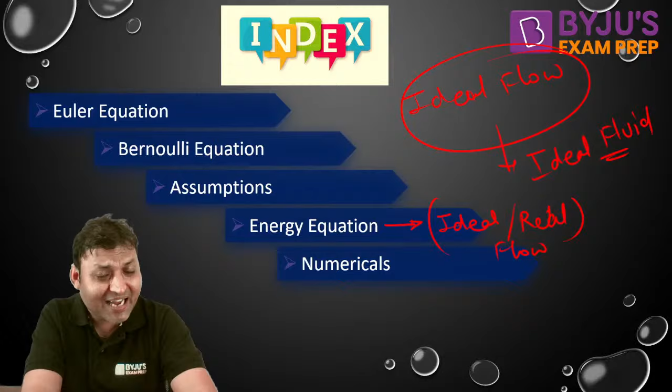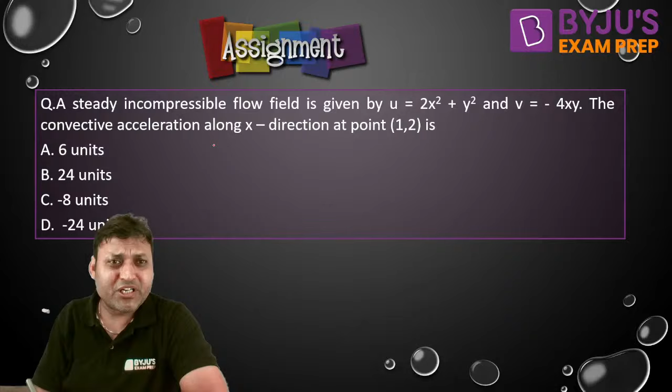Okay, so first of all, we will discuss the assignment question. Very simple question, but the question was from acceleration study. Incompressible flow field is given by U and V. What is the answer to this question? V is minus 4xy.

The convective acceleration. What is the local acceleration if the flow is steady? Do you agree? Local acceleration will be 0.

The convective acceleration along x direction. So the formula for ax convective is equal to u into del u by del x plus v into del u by del y. This will give you the result, and the point where we need to find out the acceleration is 1, 2. Do I need to solve it, or will you be able to solve it on your own?

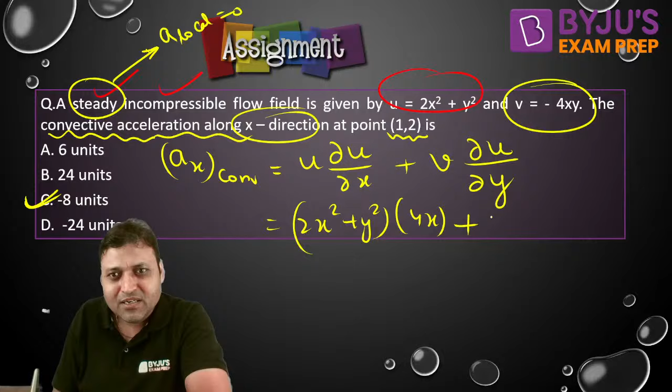U is 2x square plus y square. Then del u by del x is 4x, and v is minus 4xy, into del u by del y is 2y. Put the value.

x is equal to 1 and y is equal to 2. You will get ax convective as minus 8 units, isn't it? You will be getting minus 8 units.

Can you find out ay convective? Had anybody tried ay convective? Can you guys find out ay convective?

If you want to find out ay, local will be 0 because the velocity is not a function of time. The flow is steady, so the local will be 0. So for ay convective, you need to write u into del v by del x plus v into del v by del y, and put x is equal to 1 and y is equal to 2.

Can you let me know whoever had calculated ay convective? And if the question is asking you to find out the total acceleration, then it is under root of ax square plus ay square, isn't it? What is ay? What is the value of ay?

I have also given it a try. I had also tried it. I had got minus 16 units. Did you guys get minus 16 units?

So it is 8 square plus 16 square under root, which will be the total acceleration at point 1, 2. How many of you have got minus 16 units?

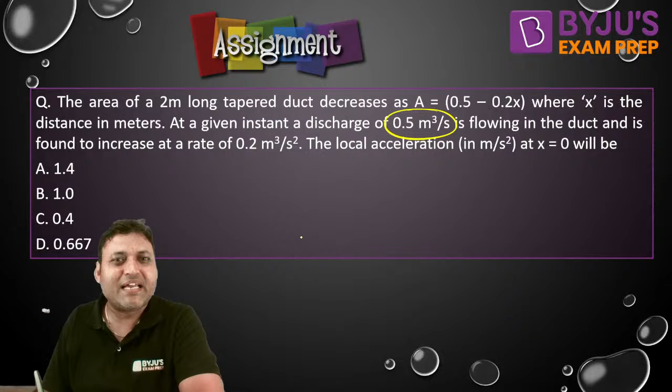At a given instant, a discharge of 0.5 meter cube per second is flowing in the duct and is found to increase at the rate of, what is this? This is dq by dt. The rate of change of discharge is 0.2 meter cube per second per second.

What is the answer? The local acceleration in meter per second square at x is equal to 0. What is the expression for local acceleration?

It is del v by del t, and v can be written from the continuity equation. V is q by a, because area is not a function of time, so it is 1 by a into del q by del t, which will give you the answer. So that is what 1 by a is.

1 upon 0.5 minus 0.2x, into del q by del t, which is 0.2, and at x is equal to 0, we will get the local acceleration to be 0.2 upon 0.5, that is 0.4 meter per second square.

Yes, Bhavya, well done, good. C is the correct answer for this as well.

Can you find out the convective acceleration? Had anybody tried for convective acceleration at x is equal to 0? What is the value of convective acceleration?

What is the value of convective acceleration? If we talk about the convective acceleration, that is v into del v by del x. That is how the convective acceleration will be.

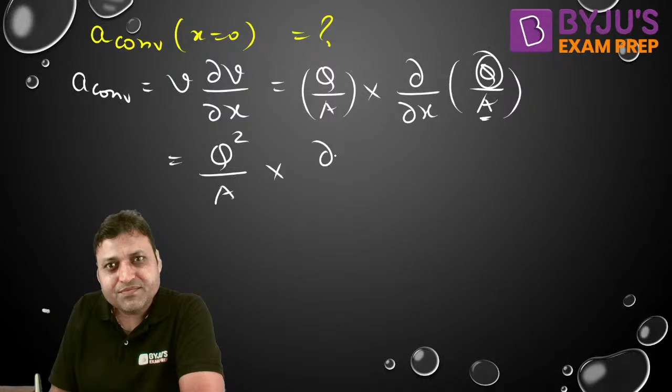We can write q by a. Q is not a function of x, area is a function of x, so it will be q square upon a into del, differentiation of 1 by a. That is how it will be solved.

So q square by a into del by del x of 1 upon 0.5 minus 0.2x. Can you do the differentiation?

It will be q square by a into minus 1 upon 0.5 minus 0.2 whole square, into minus 0.2.

Area is also this. If you do the calculation and put x is equal to 0, you will get 0.4 unit or 0.4 meter per second square for ax. That is the correct answer. All right.

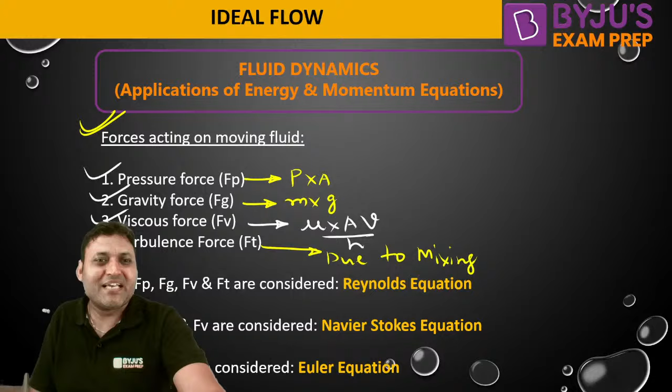Then the gravity force, that is the weight, m into g, that is the gravity force. The next major force acting on the fluid is viscous force, which can be calculated from Newton's law of viscosity, mu A v by h. And there is another force called turbulence force, which is due to mixing. When mixing dominates the flow, a force develops called turbulence force. So these are all the major forces acting on the moving fluid.

Now if all the forces are taken into consideration in the analysis, we get the Reynolds equation. That is for turbulent flow. Analysis of turbulent flow is done by using the Reynolds equation.

Now, if the turbulence force is ignored, and only pressure force, gravity force and viscous force are taken into consideration, the equation obtained is called the Navier-Stokes equation.

How many of you know the Navier-Stokes equation? How many of you are comfortable with it? For analysis of laminar flow, the equation to be used is the Navier-Stokes equation. And if the viscous force is not considered, then only pressure force and gravity force are taken into consideration.

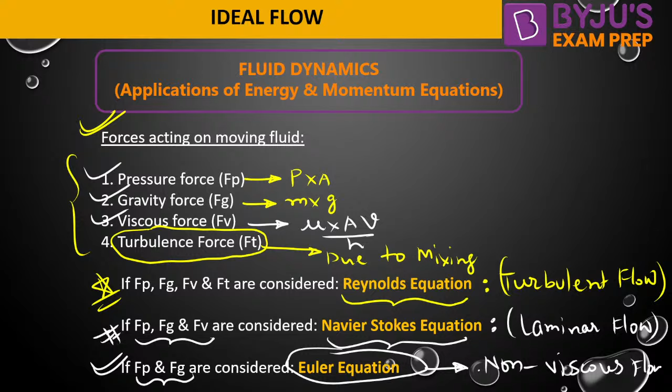Then we get the equation called the Euler equation, that is for non-viscous flow. So we start our analysis with the Euler equation for ideal flow, then move to the Navier-Stokes equation for laminar flow, and finally enter the Reynolds equation for analysis of turbulent flow. That is how the difficulty level of analysis keeps increasing, isn't it?

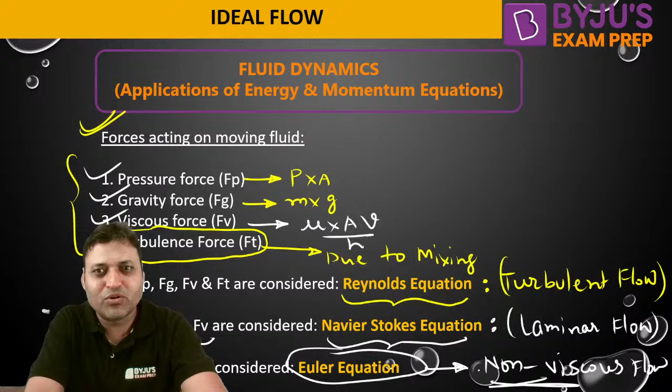So today's session is all about ideal flow. Let us talk about the Euler equation first. The Euler equation is obtained when we take these assumptions into consideration.

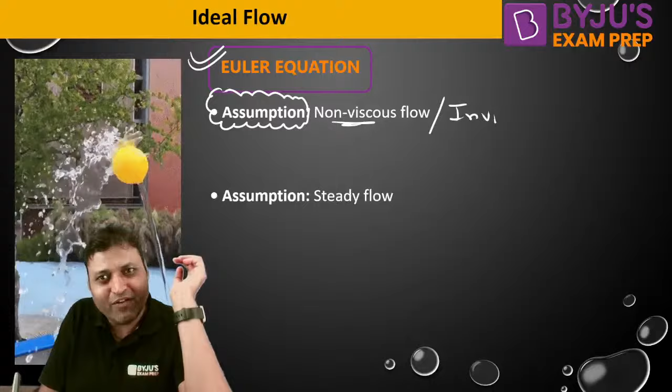The flow must be non-viscous. Non-viscous is also known as inviscid flow, or we can call it frictionless flow. Can you let me know when the flow is non-viscous or frictionless? When tau is equal to zero, when there is no shear stress developed, then the flow is non-viscous.

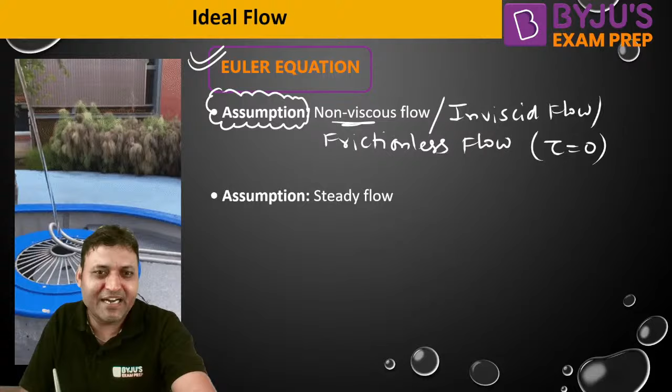No, non-viscous is not ideal. By saying non-viscous does not mean ideal. Non-viscous means there is no shear stress developed between the adjacent fluid particles, and there is no relative motion between the adjacent fluid particles.

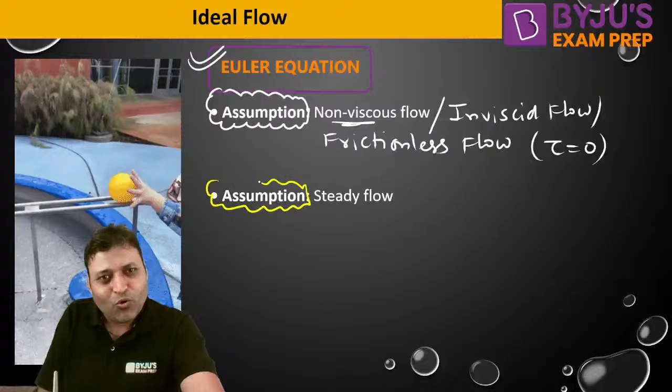And the next assumption is steady flow. What is steady flow? When the fluid behavior does not change with time, when the pressure, density, velocity are independent of time, then the flow becomes steady flow.

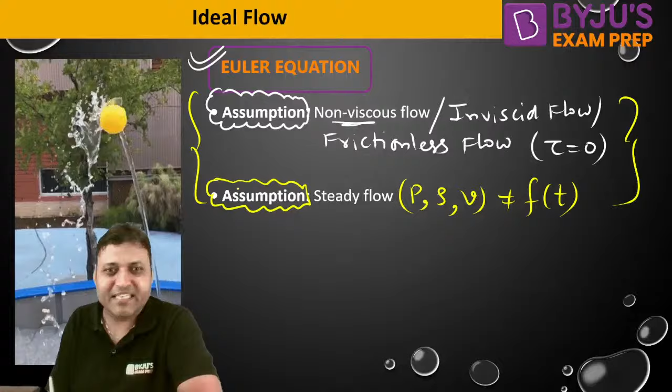So when we develop the mathematical expression keeping these assumptions into consideration, we get dP by rho plus g into dZ plus V into dV is equal to zero. This is called the Euler equation.

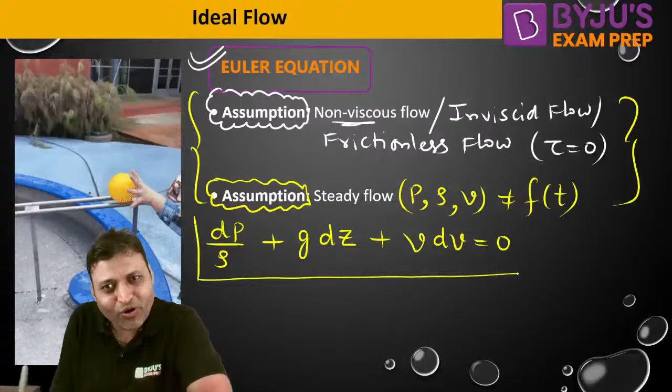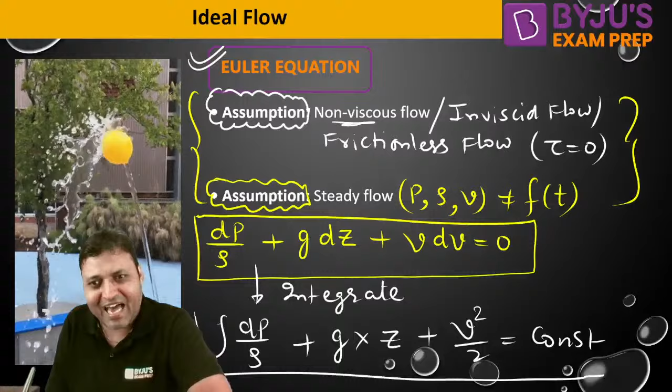And if we integrate this equation, we get: integration of dP by rho plus g into integration of dZ, that is Z, plus integration of V dV, that is V square by 2, is equal to a constant. These are the Euler equations — one is the differential form, the other is the integral form.

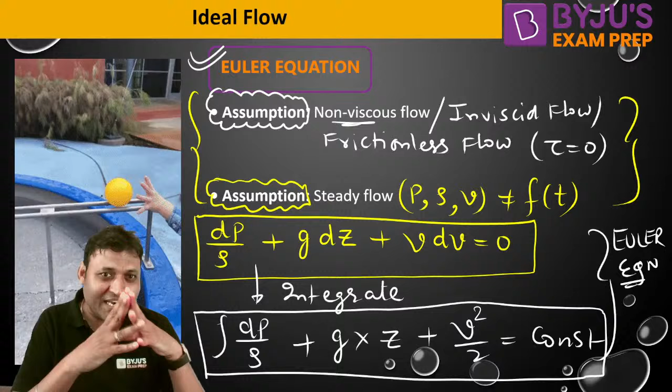For the Euler equation, the assumptions taken into consideration are that the flow must be non-viscous, inviscid or frictionless, as well as the flow must be steady. So we are just one step behind the Bernoulli equation.

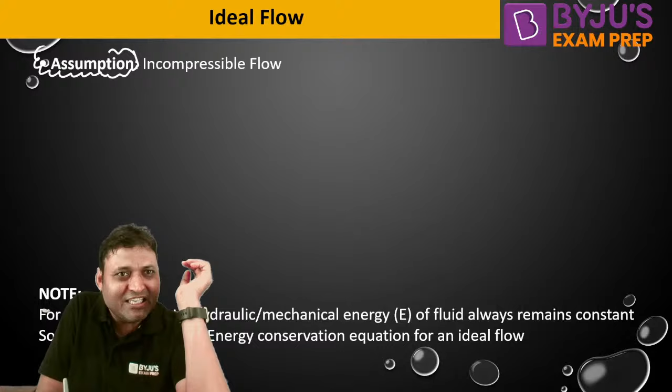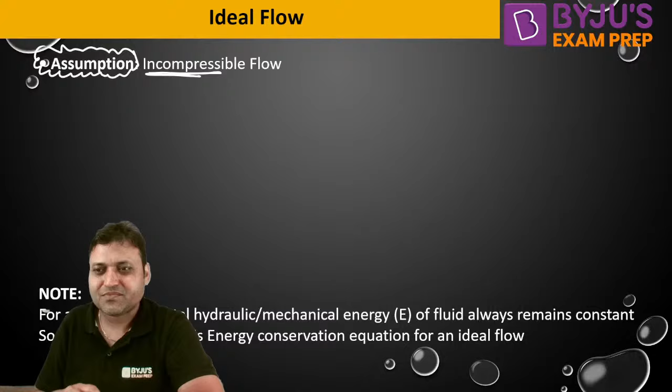From this equation, we can easily obtain the Bernoulli equation when we take into consideration another assumption, that is incompressible flow. Anybody have any idea when we call the flow incompressible? When the density of the flow is neither a function of space nor time — if density remains constant, then the flow is incompressible.

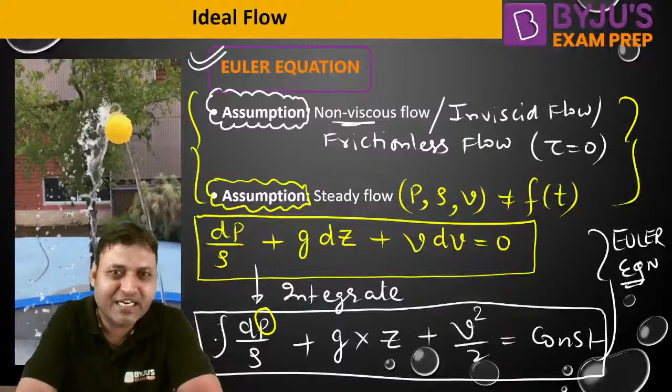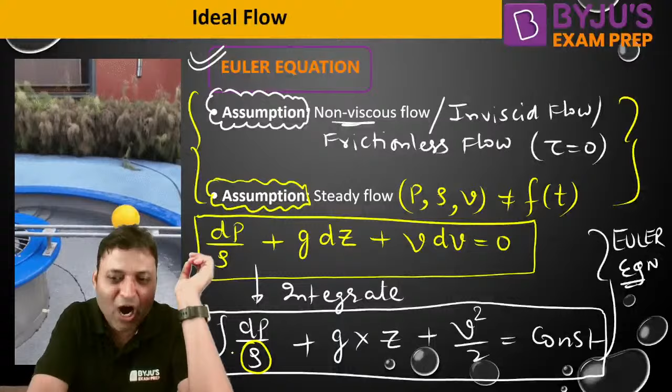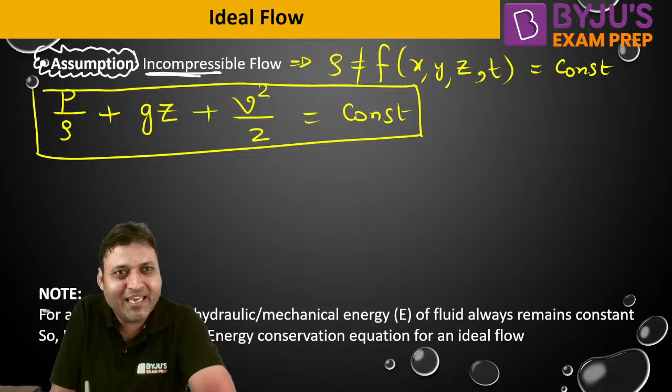In the previous expression, I kept pressure inside the integration because the density was not constant. That is why we did not take density outside. But as we now assume the flow to be incompressible, we are left with P by rho plus gZ plus V square by 2 is equal to constant. That is nothing but our favorite Bernoulli equation. This is called the Bernoulli equation.

This is called the Bernoulli equation. What are the assumptions for the Bernoulli equation? There are three assumptions we have taken into consideration.

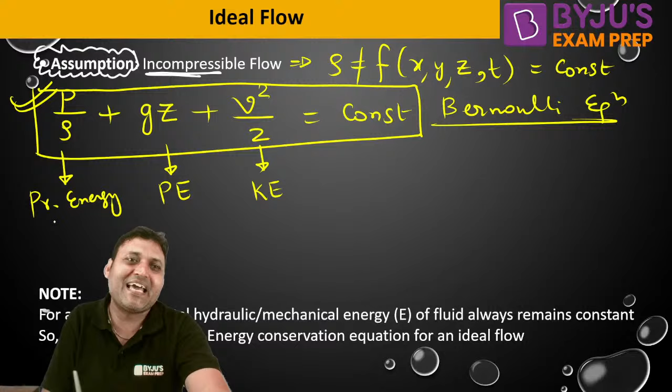Each and every term here represents the energy of the fluid. The first term represents the pressure energy, the second term represents the potential energy, and the third term represents the kinetic energy of the fluid. The sum of all these three energies is nothing but the total hydraulic energy or mechanical energy of the fluid.

Why do we call it mechanical energy? Because these energies can be easily converted into mechanical work. That is why they are known as the mechanical energy of the fluid. So that is how we obtain the Bernoulli equation.

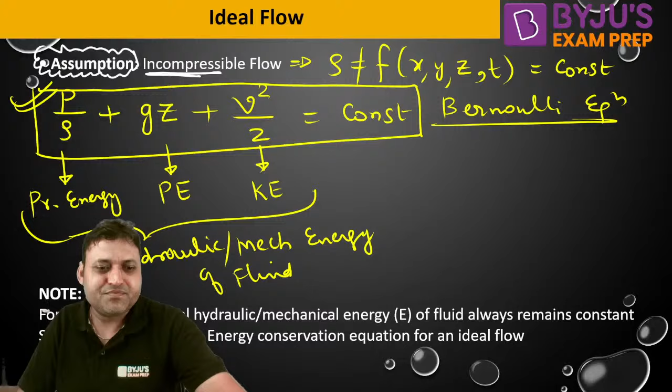Is this clear? So my question to everyone is, what is the unit of each and every term here? Can you guys let me know?

Pressure energy is written as pressure into volume, that is the pressure energy. M into G into Z is potential energy, and half mv square is kinetic energy, isn't it? Pressure energy is pressure into volume.

If we divide each and every term by mass, volume per unit mass is 1 by density, that is how P by rho comes into picture. If we divide this by mass, that is how Gz comes into picture. If we divide by mass, then V square by 2 comes into picture.

So it is energy, the unit of energy is joule. Pressure energy is joule, so the unit of each and every term represents energy per unit mass. So the unit is joule per kg, it is joule per kg, not joule per meter cube. The unit of each and every term is joule per kg.

Is this clear? So when the flow is non-viscous, steady and incompressible, we call that flow to be ideal flow, and for the ideal flow, the total hydraulic or mechanical energy of the fluid always remains constant. That is why the Bernoulli equation is nothing but the energy conservation equation for an ideal flow.

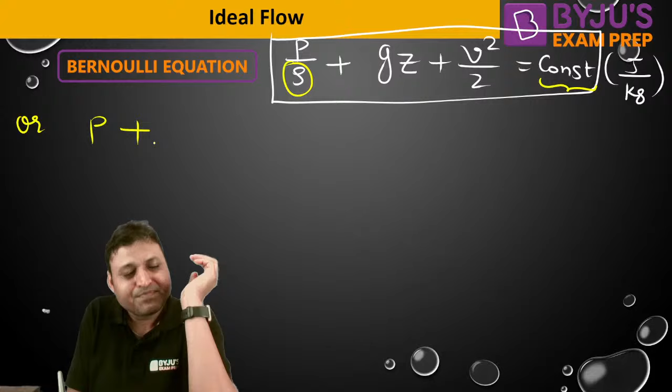Another way of writing the Bernoulli equation is, if we multiply the whole equation by rho, because rho is a constant parameter, there is no effect on the right hand side. So we can also write it as P plus rho Gz plus rho V square by 2 is equal to constant multiplied by rho, which is another constant.

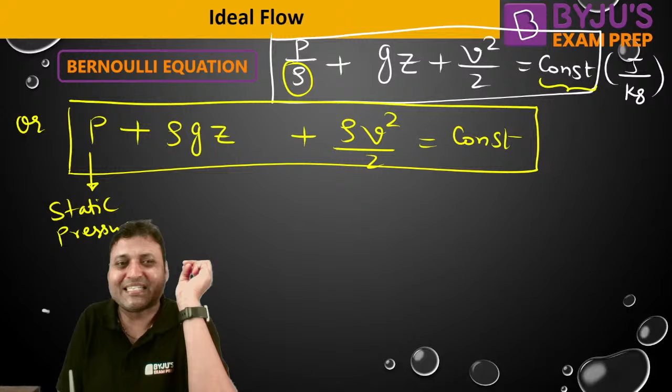What is the unit of each and every term here? The first term represents the pressure of the fluid, that is called the static pressure of the fluid. What is the unit? Yes, the unit is Pascal. What is the unit in terms of energy? Still it represents the energy. The first term represents the static pressure of the fluid.

The second term represents the hydrostatic pressure of the fluid, rho Gz, from the hydrostatic law, that is called hydrostatic pressure. And the third term can be called the dynamic pressure of the fluid, which has the unit of pressure, but it is the kinetic energy represented in the unit of pressure, that is called the dynamic pressure of the fluid.

When we combine the static pressure and hydrostatic pressure, we can call it piezometric pressure. Have you heard the name piezometric pressure?

The static pressure is obtained from manometers, which are instruments used for measuring the static pressure of the fluid, P. So this is the reading of the manometer. Can you let me know the static pressure? Will it be absolute pressure or gauge pressure? In this equation, the static pressure, will it be absolute or gauge? Can you let me know?

Pressure into volume is the pressure energy, but volume is missing here, so each and every term represents energy per unit volume. The unit is joule per meter cube, or joule can be written as Newton meter, so it will be Newton per meter square. That is how Newton per meter square, or Pascal, can also be obtained. Joule per meter cube is nothing but Newton per meter square, since joule is Newton into meter. So my question to everyone is, the static pressure, is it absolute pressure or the gauge pressure?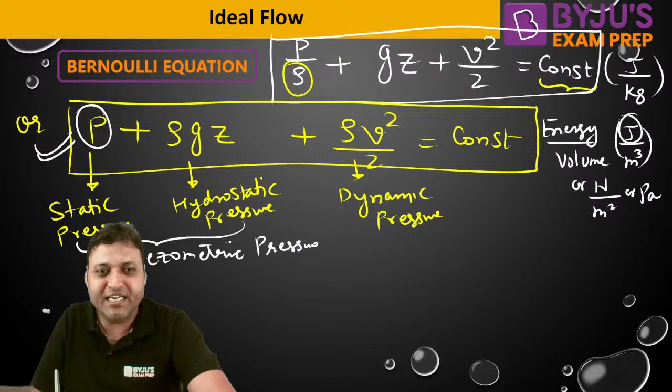Another way of writing this is the second way. If we divide the entire equation by rho and g both, we get P by rho g plus Z, then V square by 2g is another constant. This is the expression we frequently use in our mathematical calculations. This is the third way of representing the Bernoulli equation.

What is the unit of each and every term here? So for Z, m into g is missing, so it is energy per unit weight, that is joule per Newton, or we can call it meter. So it is head, the static pressure head. The first term represents the static pressure head.

Sorry. What happened?

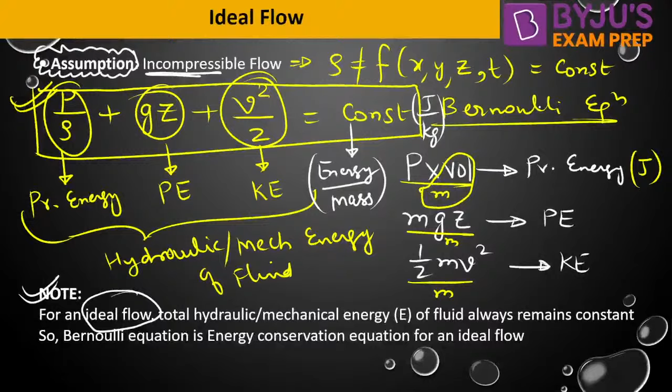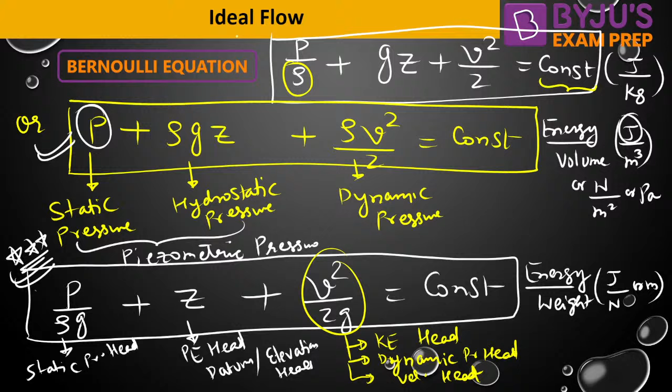Yes, the first term represents the static pressure of the fluid, the static pressure head. The second term represents the potential energy head of the fluid, which we can call datum head or elevation head. The third term we can call the kinetic energy head, or the dynamic pressure head, or the velocity head. So these are the three ways of representing the Bernoulli equation: number 1, number 2, and number 3.

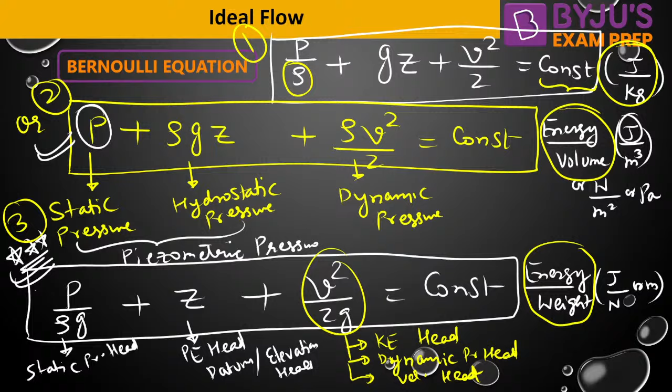But you should be clear with the unit of each and every term. The first expression represents energy per unit mass, the second expression represents energy per unit volume, and the third expression represents energy per unit weight. Is it clear to everyone? Is this clear?

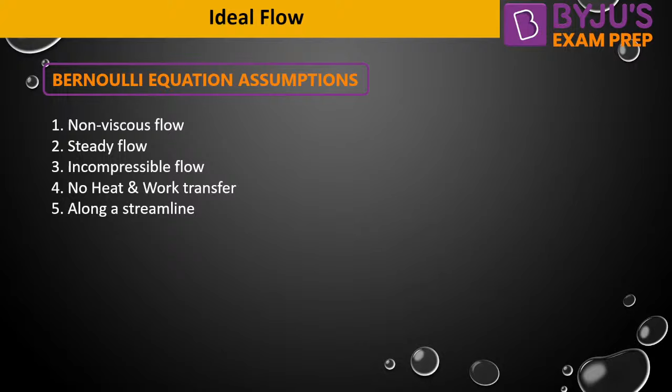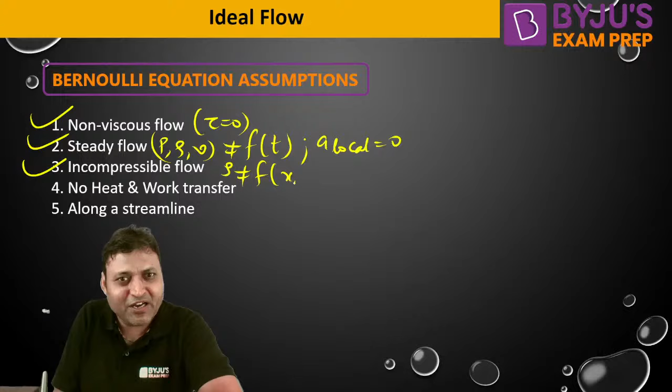Assumptions which are required in applying the Bernoulli equation. I've already discussed some of these assumptions: non-viscous flow, tau must be 0; steady flow, where pressure, density, velocity are independent of time, or local acceleration should be 0; the flow must be incompressible, density should not be a function of space or time, density must remain constant; and there is no heat or work transfer. What does that mean? There should not be any other form of energy transfer to take place in the fluid flow.

Energy transfer can be possible in two ways, as you must have studied in thermodynamics: either in the form of heat transfer or work transfer. So there should not be any other form of energy transfer. And if the points are lying along a streamline, even if it is rotational flow, for the rotational flow field, the points should be on the same streamline.

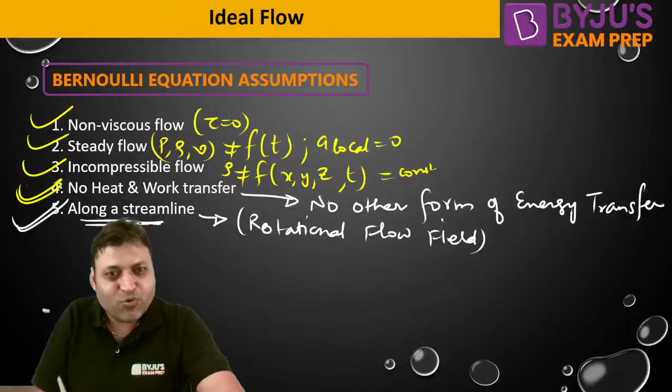So these are the various assumptions to be taken into consideration. I had asked you guys, what is P? The equation is P by rho g plus Z plus V square by 2g must be constant. That is the Bernoulli equation. What is P here? P is the static pressure of the fluid, which can be measured by using the manometer by writing the pressure equation.

The static pressure, is it gauge or absolute? It is purely your choice. You can take it absolute or gauge. That is your choice, it will not affect the final result. You can take the pressure to be gauge pressure or absolute pressure.

What is Z? Z is the vertical distance from a reference line, always the vertical distance from a reference. You can draw a horizontal line, which is the reference line, and the vertical distance of the point from the reference line is Z, and V is the flow velocity. That is how we can apply the Bernoulli equation when the flow fulfills all the mentioned assumptions in the question.

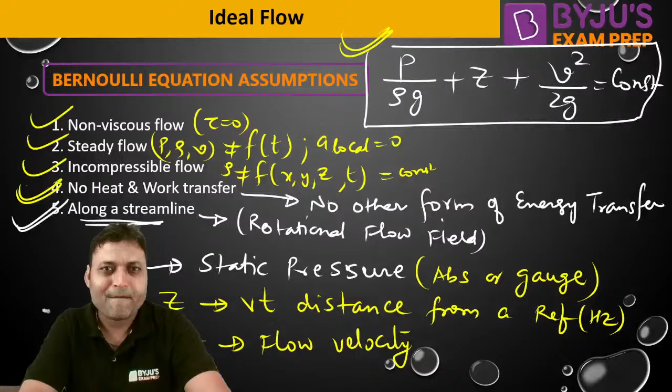The Euler equation is not based on the conservation of energy actually. If you go to the derivation, you will understand that the Euler equation is based on the conservation of momentum. It is the momentum conservation of Newton's second law which gives rise to the Euler equation. So the Euler equation is based on conservation of momentum or Newton's second law. Yes, Susoban, conservation of energy will not be the correct answer. It will be the conservation of momentum.

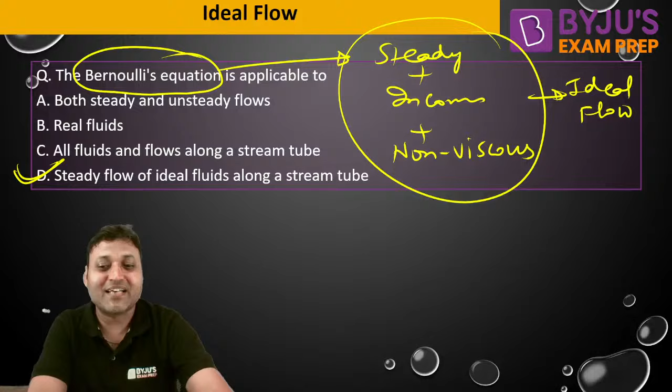That is how theoretical questions can also be framed out of these concepts. Theoretical questions are actually more dangerous than numerical ones. So when the flow is ideal, there will not be any energy loss in the flow. That is how we can call the flow ideal.

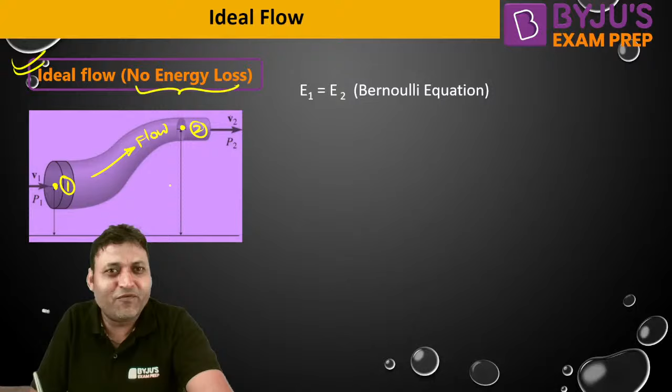This is, let us say, point 1. This is, let us say, point 2. There is a fluid flowing and the flow is ideal. So for the ideal flow, the total hydraulic energy at any point 1 will be equal to...

That is not called the Bernoulli equation, Susoban. We do not call it the Bernoulli equation. Energy conservation is a universal law. We can apply energy conservation everywhere. But if we are using the word specifically Bernoulli equation, then it is only applicable when the flow is ideal, when there is no energy loss. Have you understood it?

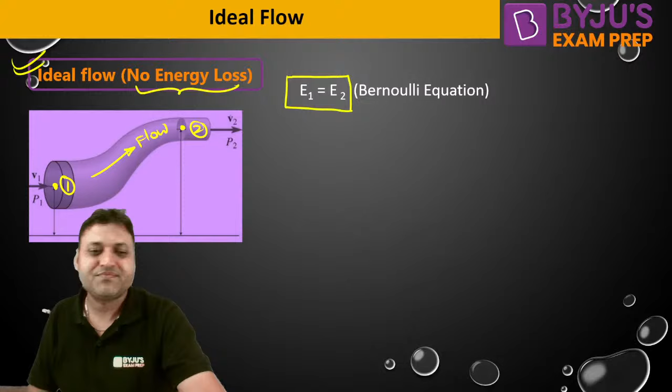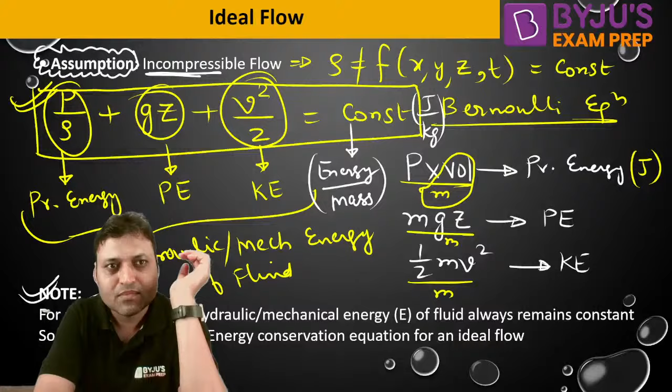So when there is no energy loss, only then do we call it the Bernoulli equation. So total energy at 1 will be equal to total energy at 2, or we can write H1 is equal to H2. What is H? That is the total energy head. I should have mentioned it here. This is called H. H is the total energy head. Right? H1 will be equal to H2.

Or we can say P1 by rho g. P1 is the static pressure here, already shown. P1 is the static pressure at point 1, P2 is the static pressure at point 2. Static pressure is obtained when the manometer is attached normal to the flow. So we can say P1 by rho g, pressure head at 1, plus Z1.

How to find out Z1? You draw a horizontal line and call it the reference line. Z1 is the vertical height of point 1 from the reference line, and Z2 is the vertical height of point 2 from the reference line. P1 by rho g plus Z1, and V1 is the velocity of flow at point 1, V1 square by 2g, is equal to pressure at 2 plus Z2 plus V2 square by 2g.

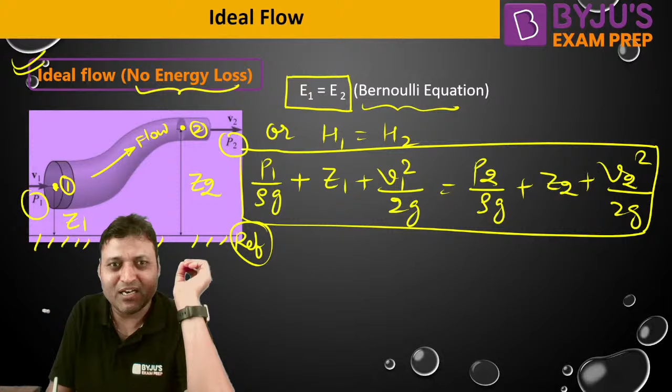That is how we can write the Bernoulli equation for ideal flow. And similarly, we can apply it for real flow also. But that is not the Bernoulli equation, that is called the energy equation. We do not call it the Bernoulli equation.

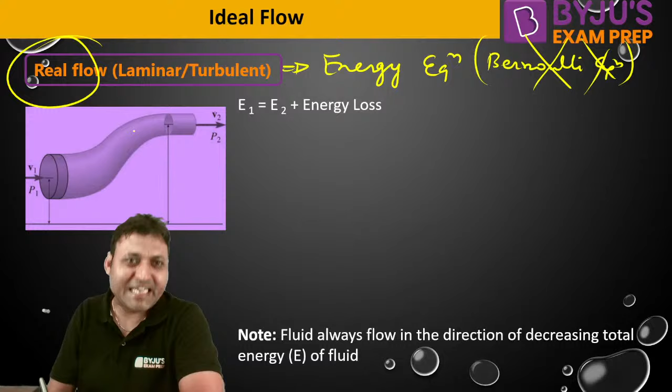It is not called as Bernoulli equation when the equation, the energy conservation, is applied to the real flow, either laminar or turbulent. In the flow direction there is energy loss. If the flow is from 1 to 2, there will be some energy loss in the flow direction due to friction.

This is between the fluid particles, because the flow is viscous. So we can say, because the flow is from 1 to 2, the total energy at 1 will be equal to total energy at 2 plus the energy loss from 1 to 2. That is why the energy loss is from 1 to 2. Or we can say E1 will be greater than E2 because the flow is from 1 to 2.

The total hydraulic energy at 1 is equal to total hydraulic energy at 2. Or we can say H1 is equal to H2 plus the loss from 1 to 2, the head loss from 1 to 2 in terms of head loss. This is how you can write the energy conservation.

So P1 by rho g plus Z1 plus V1 square by 2g, that is H1. That is H1 is equal to P2 by rho g pressure head plus Z2 plus V2 square by 2g, that is H2 plus HL. HL is the frictional head loss from 1 to 2. That is called as energy head loss or the frictional head loss. We can call it as energy head loss.

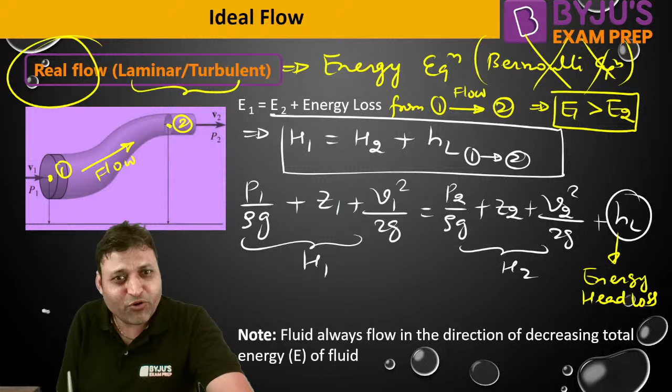And that is due to friction, that is why we can call it as frictional head loss also. If the flow would have been from 2 to 1, can you write the energy equation for the flow from 2 to 1? If the flow is from 2 to 1, then we will say E2 is greater than E1, or we can say H2 is equal to H1 plus HL from 2 to 1.

That is how the energy conservation works. So it will be P2 by rho g plus Z2 plus V2 square by 2g is equal to P1 by rho g plus Z1 plus V1 square by 2g plus HL from 2 to 1.

So what we can conclude from here, the fluid always flows in the direction of decreasing total energy of the fluid. If the flow is from 1 to 2, the energy at 2 will be less than energy at 1. If the flow is from 2 to 1, the energy at 2 will be greater than energy at 1. So the fluid always flows in the direction of decreasing energy, or we can say in the flow direction total energy decreases. In the flow direction, the total hydraulic energy always decreases.

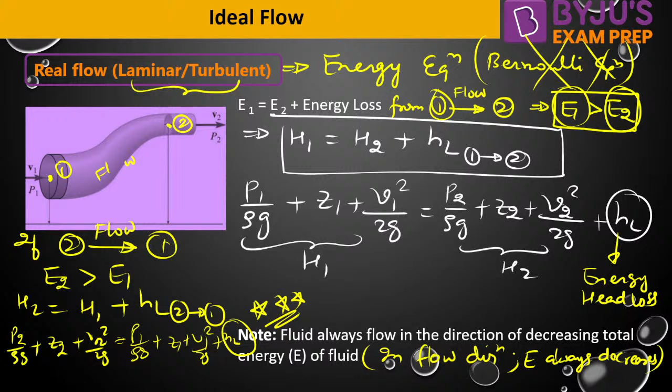Is this clear? That is how we can extend the energy conservation equation for the real flow. If the losses are not considered, the same equation can be called as Bernoulli equation. Otherwise, we do not call it as Bernoulli equation.

Again, let us solve some questions and then we will stop our session. There is a question on the screen. Can you find out the answer to this one? Now it is your turn. Can you just solve the question which is there on the screen?

There are two locations, 1 and 2.

Thank you, Deepak. Thank you for your motivational saying. We are also human, and we also require motivation. And we get our motivation, we get our energy, we get charged up from the students' comments only. Definitely, I will bring more and more such sessions.

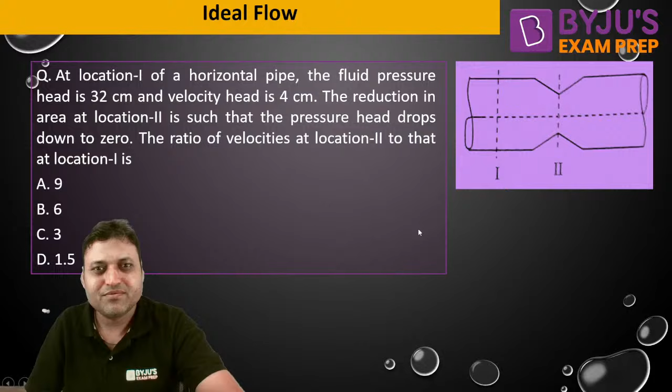Now there is a question on the screen. Can you just let me know the answer? Can you? There are two sections, 1 and 2. Horizontal pipe, the pipe is horizontal. Can we say Z1 is equal to Z2? Because the points are lying at the same elevation.

The fluid pressure head is 32 centimeter. What is that? At location 1, so P1 by rho g is 32 centimeter. It is P1 by rho g head, it is about head. And the velocity head V1 square by 2g is equal to 4 centimeter. The reduction in area at location 2 is such that the pressure head drops down to 0.

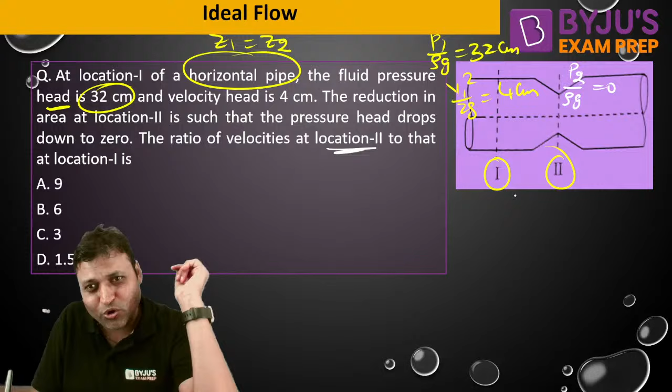What does that mean? The pressure P2 by rho g becomes 0, and the ratio of velocity at location 2 to that at location 1 is asked. The question is asking you to find out the ratio of V2 by V1. What is the answer? So if we apply the Bernoulli equation, we can say P1 by rho g plus V1 square by 2g should be equal to V2 square by 2g. Do you agree or not? Because I have put Z1 is equal to Z2 and P2 is equal to 0.

That is what I have applied. So P1 by rho g is 32 plus 4, that is V2 square by 2g. V2 square by 2g is equal to 36 centimeter. So V2 square by 2g divided by V1 square by 2g is equal to 36 divided by 4.

That is 9. But 2g is getting cancelled out. The question is not about V2 square by V1 square, it is about V2 by V1. Isn't it under root 9? That is 3. C is the correct answer.

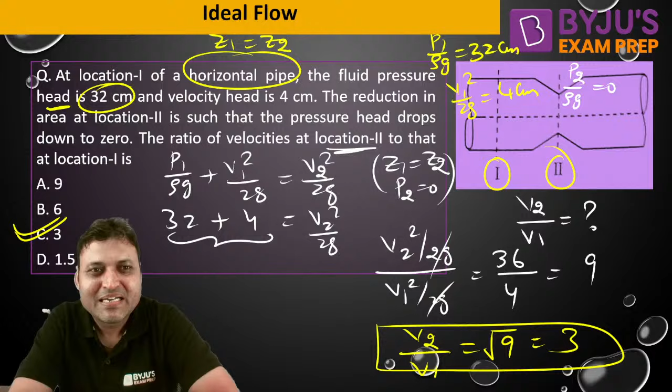Yes, Bhavya. Where are others? Not interested in solving? Didn't bring your notebook? C will be the right answer. Those who have not given me the answer for this question, please, it's my humble request, give me the answer for the next one. The next question is on the screen.

The liquid flows downward through a tapered vertical portion of a pipe. At the entrance, this is the entrance, this is the exit. Because the flow is from entrance to exit, that is the flow direction, the static pressures are equal.

What does that mean? If we call the entrance to be 1 and exit to be 2, so P1 is equal to P2. Static pressures are equal, P1 is equal to P2, isn't it?

If for a vertical height h, the velocity becomes 4 times, V1 is equal to V and V2 becomes 4V. Then the ratio of h to the velocity head. What is the velocity head? So the question is about h upon v, velocity head at entrance.

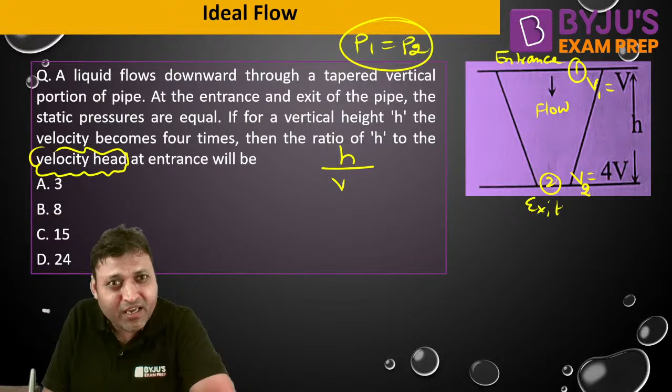So V1 square by 2g, that is what we need to find out. The ratio of h upon V1 square by 2g. It is not velocity, it is the velocity head at entrance.

So now if we apply the Bernoulli equation, for that we need Z1 and Z2. If I call this to be reference line, we can call any horizontal line to be reference line. If we call this horizontal line to be reference line, do you agree Z1 will be equal to 0? And point 2 is lying below the reference line. Do you agree Z2 is equal to minus h?

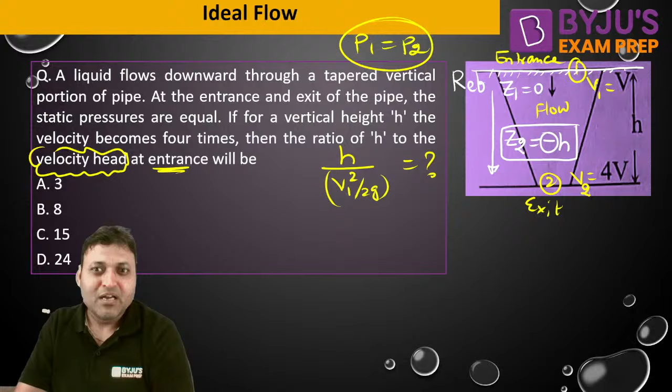That is important. If the point lies on the reference line, the potential energy will be 0. If the point is lying below the reference line, the potential energy will be negative. If the point is lying above the reference line, then it will be a positive value. So P1 and P2 are equal if I write the Bernoulli equation.

So we can say Z1 is also 0. V1 square by 2g on the left hand side is equal to Z2 plus V2 square by 2g. Put the value. V1 square by 2g, if we put the values, what is V1? That is V. So V square by 2g is equal to minus h plus V2 is 4V square by 2g. Do the calculation.

So it will be h is equal to 16v square by 2g minus v square by 2g. That will give you h equal to 15v square by 2g, and don't you think h upon v square by 2g is nothing but 15? Who has the correct answer? C is correct. Mithun, how did 16 come? C will be the correct answer, 15 is the right answer.

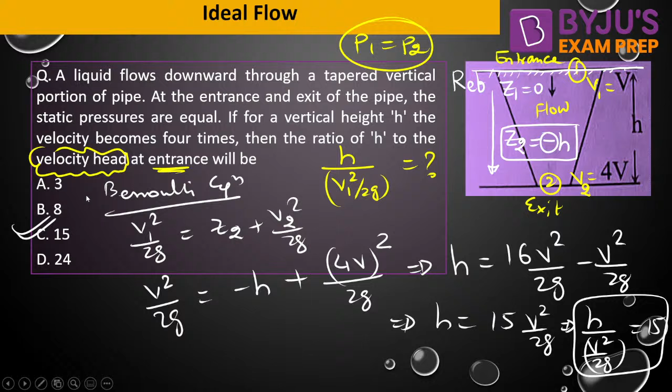That is how you should be able to apply the Bernoulli equation. I hope it is clear. Any doubt to anyone, do let me know. Can you solve the next one? Can you solve the next question?

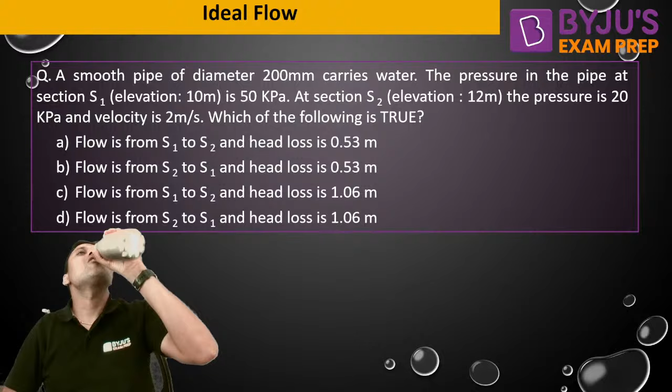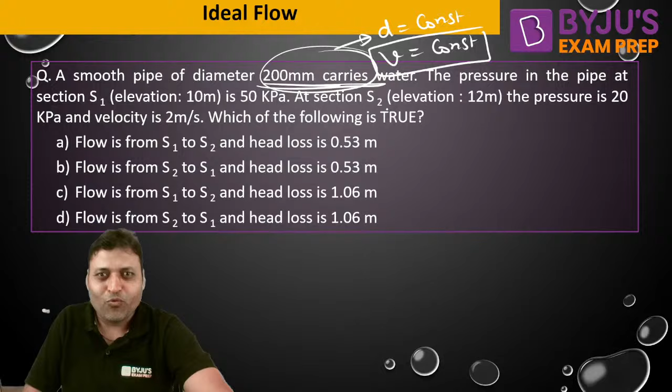The next question: a smooth pipe of diameter 200 mm carries water. It means the diameter is constant. And if the diameter is constant, from the continuity equation velocity must also be constant.

Velocity will be constant. The pressure in the pipe at section S1, which is having an elevation of 10 meter, is 50 kilopascal. Pressure is given at 1. At section S2, the elevation, the vertical height from the reference, is given as 12 meter. The pressure is 20 kilopascal and the velocity is 2 meter per second, that is the constant velocity. Which of the following is true?

Statements A and C are saying the flow is from S1 to S2, and statement B is saying flow is from S2 to S1. The head loss is also mentioned. C and D are having the same head loss, but the flow is from 1 to 2 or from 2 to 1. So what we need to do is assume the flow from S1 to S2.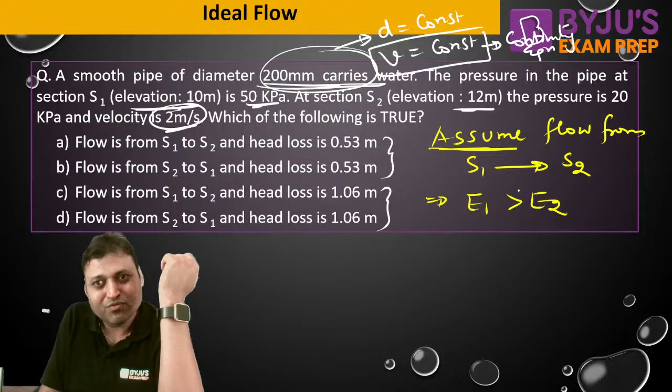You can assume from S2 to S1 also. We can assume the flow from S1 to S2 or S2 to S1. So what we can say is, E1 will be greater than E2 if we assume the flow from 1 to 2. We can say H1 is equal to H2 plus HL. If we are getting HL positive, then our assumption is correct.

If we are getting HL negative, then our assumption is incorrect, and the actual direction will be opposite. So by checking the sign of HL, we will come to know whether our assumption is correct or not. The magnitude will remain constant; it is only about the sign.

So if we assume the flow from 1 to 2, and if we apply the energy conservation equation, we can say P1 by rho g plus Z1 plus V1 square by 2g is equal to P2 by rho g plus Z2 plus V2 square by 2g plus HL.

We can say V1 and V2 are getting cancelled out. Z1 is 10, so it will be 50 kilopascal, 50 into 10 to the power 3 upon g, which can be taken as around 10. So rho is 10 to the power 3 into 10. It is water, the fluid is water. Plus Z1 is 10 meter is equal to P2, which is 20 into 10 to the power 3 Pascal.

You should take care of the unit. And rho is 10 to the power 3 into 10 plus Z2. Z2 is around, what is Z2? Z2 is 12 plus HL. So the 10 to the power 10 to the power terms get cancelled out, it will be 5, 10 to the power, it will be 2. So we can say 15.

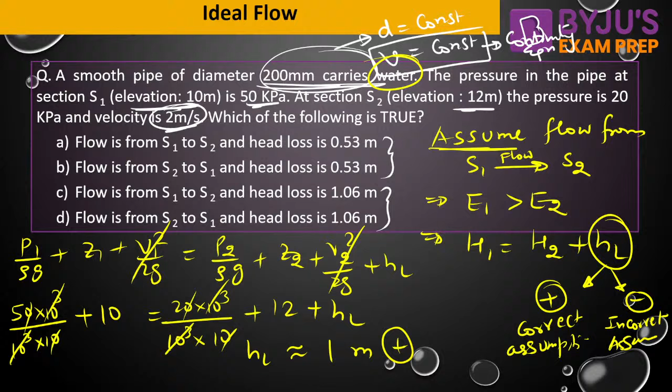Minus 12, so HL will be around 2. What is that? What is the problem? If we take 9.81, then what? 10 and then 12. 15 minus 14, yes, 15 minus 14, that is around 1 meter, and it is having a positive value. It is around 1, because I have taken g as 10 - that is how you can keep your calculation simple.

Because there are only two options for HL: one is 0.53 and another is 1.06. They are having a huge difference between them. So even if you take g as 9.81 or 10, your answer will not be getting affected much. So it is almost 1 meter and the flow is definitely from 1 to 2. So option C is the right answer.

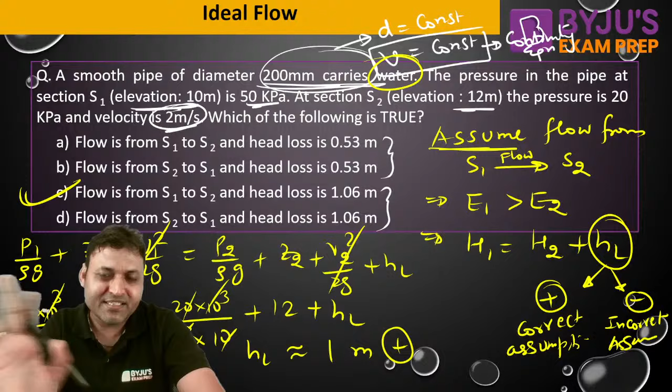Yes, but it is an MCQ question, na Bhavya? Then it will create issues for an NAT type question. If the question is numerical answer type, then definitely you need to take 9.81 only. But here, that is why I am not getting the exact answer, but yes, I can find it out. It is not going to be 0.53 at all, it is close to 1 meter. That is how you can keep your analysis simple.